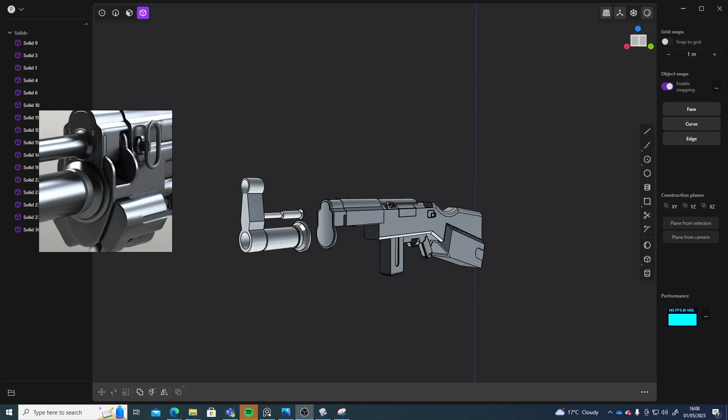Alright guys, welcome back to part 5 of making this assault rifle. So we did some good progress in the last part, and now we're going to continue making this piece and then the muzzle at the front, and then we'll start tackling some of the more kind of details here. It's quite a lot of stuff going on, but yeah, so we'll see how it goes.

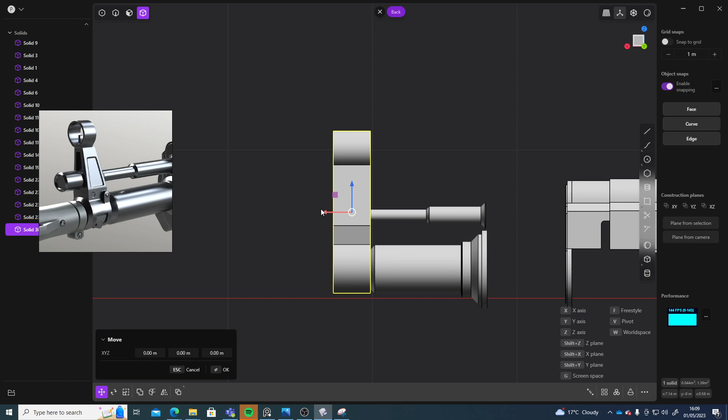So this is kind of straight at the moment, so I needed to cut and then up. To do that, it can be actually quite easy. I can just go into my side view. I'm just going to select this one for now and move it forward like so. And then I can grab a line. I'm going to go from the outside here and actually from this point, and I'm just going to cut straight to about here and then up. Let me see what that looks like if I press G, move it out. Oh, it didn't actually cut it. Let's see.

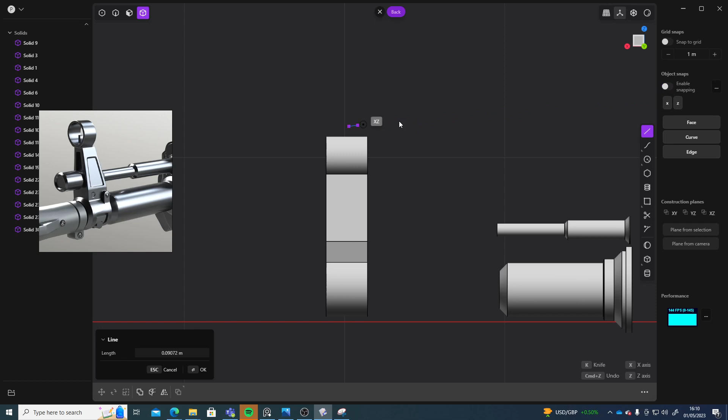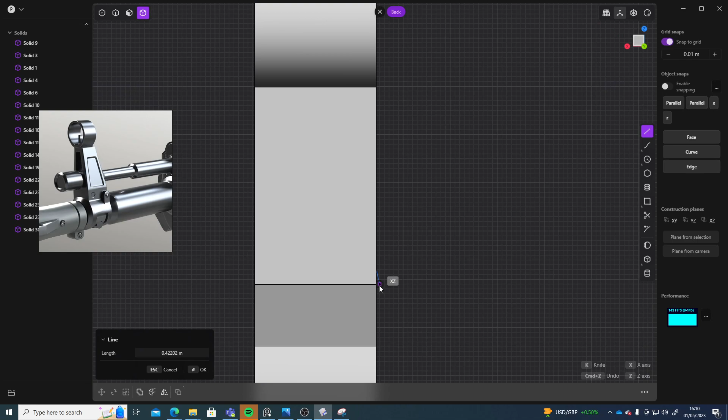Line, I'll do it for maybe here first. I want to keep that straight but snapping to that middle point. Let me just say object snapping off but grid snapping on. No, line, make it slightly smaller from here to here and then out a couple and then straight down to here and right click to confirm that. So that should create that kind of cut there.

So we can go and select the object and then press C and then select the curve and then right click to confirm, and that will cut out that piece. So I can select it, delete it, don't need that curve anymore. And we got that piece, which looks pretty nice.

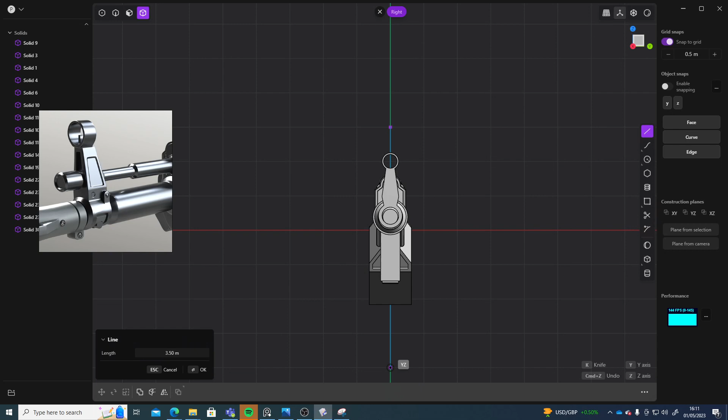I'm actually going to go into the front here. I'm going to create an edge that goes from the, let me just set that back to top, to the bottom like so, right click, and then I'm gonna select my object, press C, then select the edge, right click, and then I'll delete this half. I'll delete that curve. I'll mirror it over at the end. So another thing is this hole here, and I might do that once it's mirrored. Might be a bit easier. But this part here will be quite easy to do.

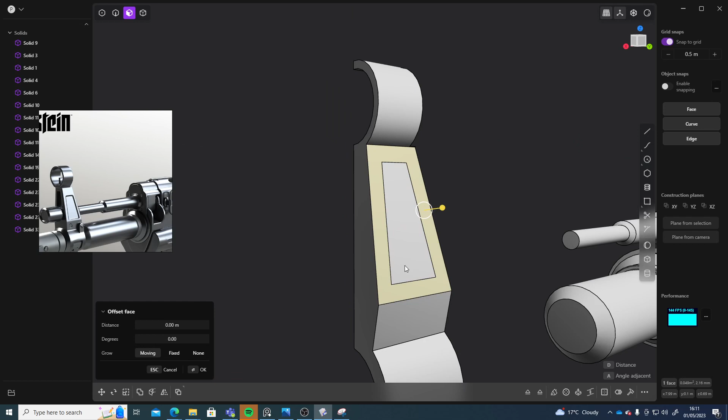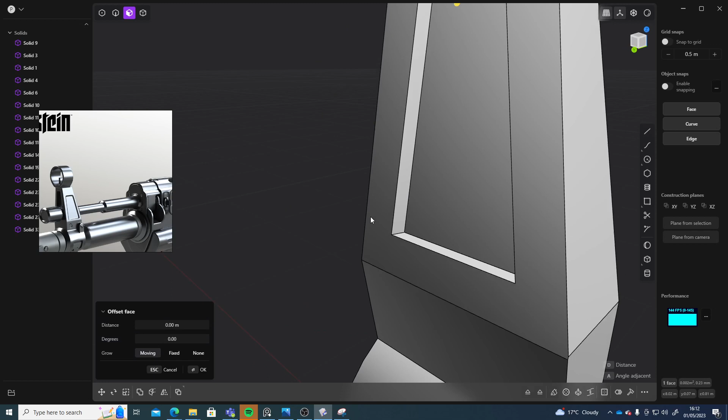I can go into face mode, select this, press O, and do something like that. And go into face, right click to confirm that, face mode again, click on this, push it in, grid snap off, push it in just a bit like that. Then I can grab this top one and pull that down till about here. If I hold Control Alt while in edge mode, I can select all of the rings, and I can give them a very small fillet. Keep them all nice and smooth.

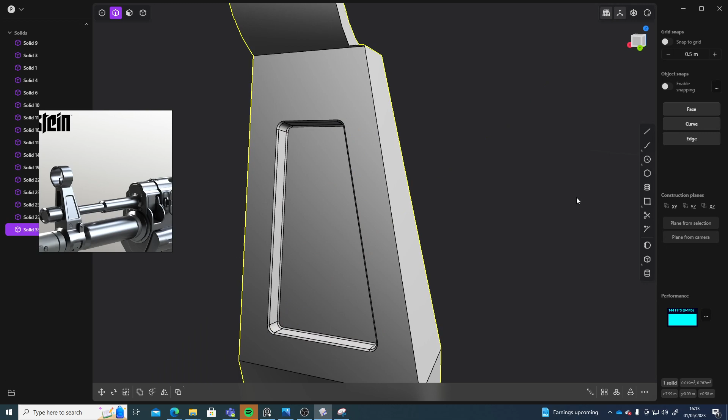Then next I'll just kind of give these a small bevel as well. Like so. And then maybe the inside ones as well. Like that. That looks good. There is a small circle cut out there as well, so I could do that. I could say center circle, and I actually go into front view. I'll just draw it straight here.

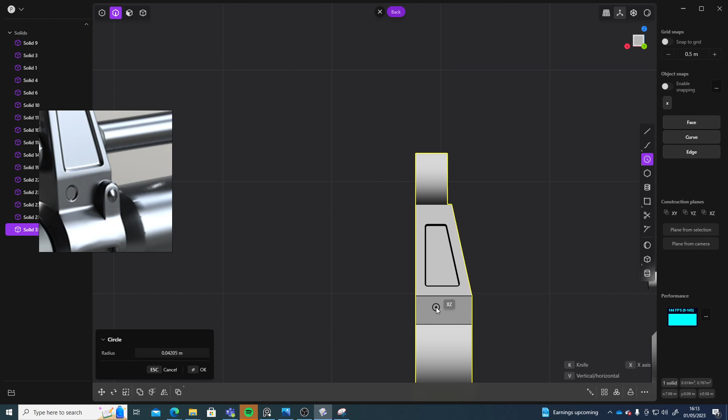So I got this. I'm going to press G, move it out, press S, scale it down about there. I'll press R, go into my front view and rotate it like that. Right click to confirm that, press 3 and push it in until it intersects it a little bit. That might be a bit too much. I'm going to pull it out a little bit.

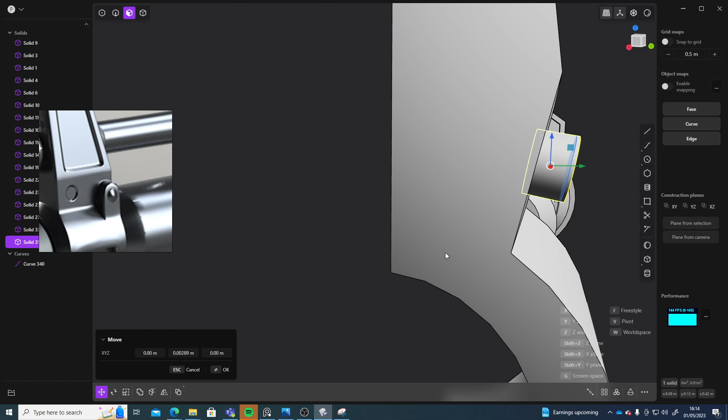Go into the front view. Just press R to rotate it. I'm just going to rotate it like that so it's almost perfectly perpendicular. Now I'll press 4, click on this, and then I'll just say Q, right click and delete that curve. So we got that little piece in there. For this little thing here, I can do a couple of different things.

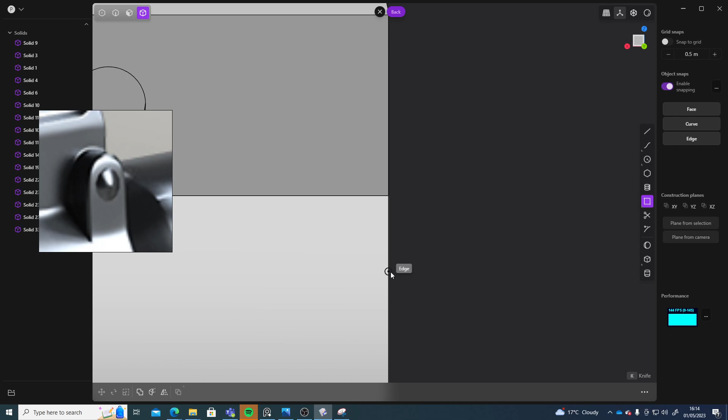So I'll go into my top view. Actually, I'll go into my front view. I'll say draw corner rectangle, and I'll say enable snapping, so it snaps to this edge here. And I'll just go out to here, and then I'll come up to maybe here. Right click to confirm that.

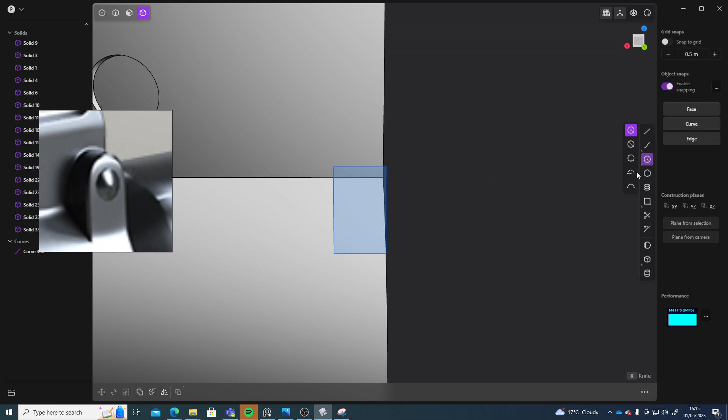And then I'll go into my 3-point arc. Click on that one, and actually I need to go into the front view because this doesn't work too well whenever you're in perspective. Be careful of that. So here to here, and it looks something like that, I believe.

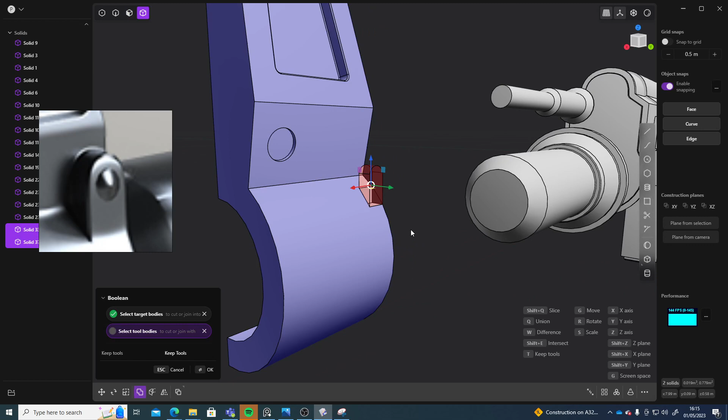Yep, that's good. Now face mode, select these two and just pull them in. There we go. Can delete these two curves. Go object mode, select this, and then shift click on this, and then press Q, right click. Then I can go into my edge, select these 3 edges, and give them a small fillet, which will make them look like they kind of are a part of that mesh.

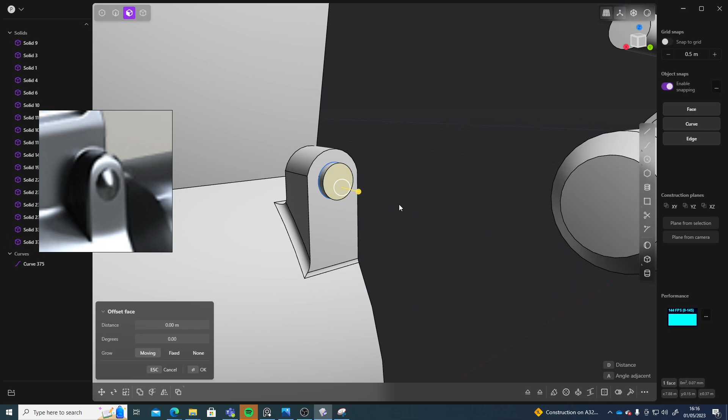Then next I can go into my front view again, and then go into center circle, and I'll do one here. Right click to confirm that, select that face, pull it out a touch, right click confirm, and then I might just go into edge mode, select this edge, and just give it quite a

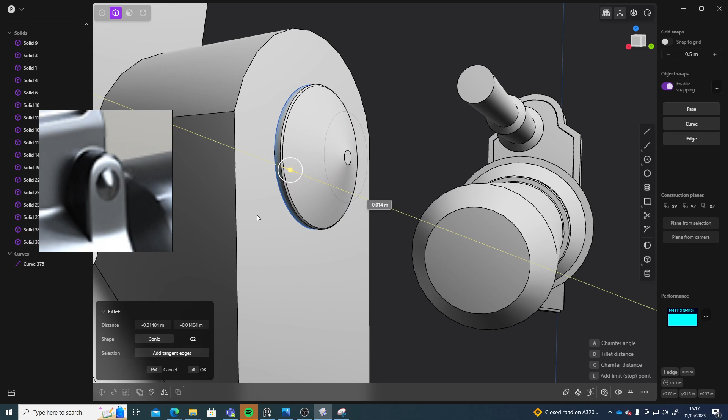I'll just give it a bevel like so, and then select this one, and do something like that. That keeps that pointy. Nice. Then I can go object mode, select this, then Q, select that, then Q again. Right click to confirm. So this piece is looking pretty nice.

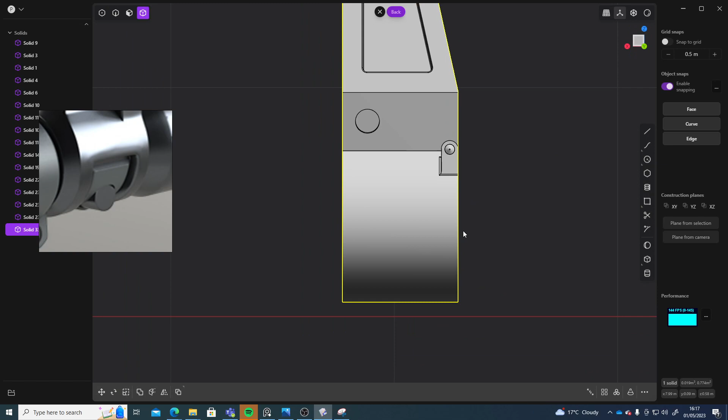There's also at the bottom here a little section there. So what I'll do is I'll go into my front view. Actually, I'll go into my side view here. I'll grab this face, and then I'll press Shift D to duplicate it. Now I'll move it to the side for now. And I want to cut out that area. So let me have a think about how I could do this.

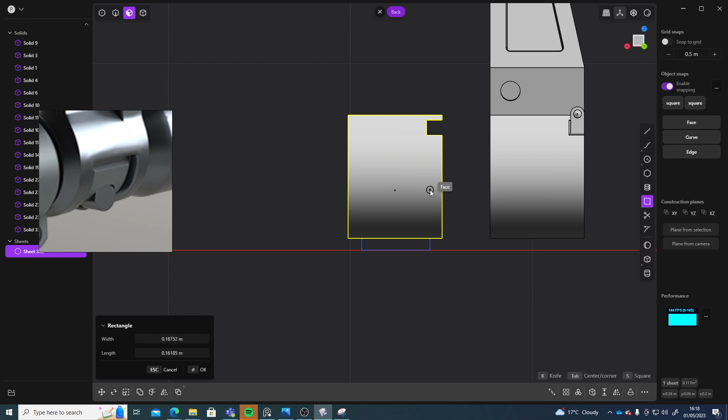So I can go into my side view, go to rectangular, corner rectangle, and I'll just click here, and then up to, it's a little bit lower I think, about there, and get both sides about right. That's good. Then face mode, select it and move it out like so.

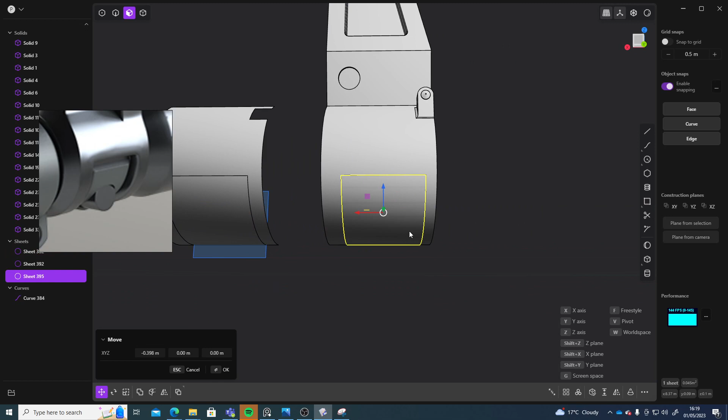Then I'll go and select this sheet and then press Q, select this one, and then I want to do Shift Q because I want to slice it. So that will actually slice this, and then I can delete these two objects, and I'll be left with this little piece here. So I can delete. Now I can grab this face, press Shift D, and move that into place. Yeah, the workflow in Plasticity is really nice.

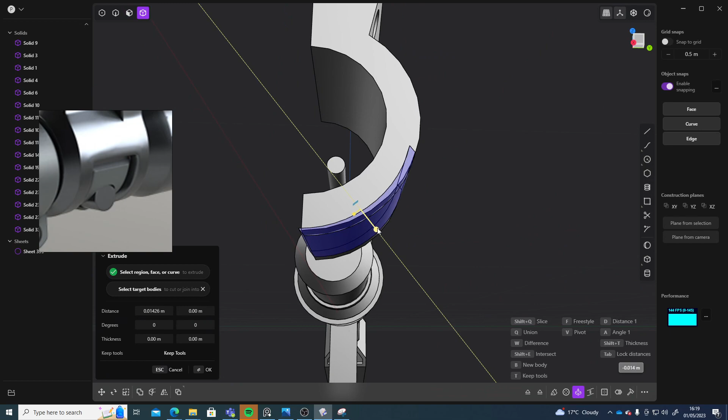Put that there. Go into object mode, and I'm just gonna delete this, and then delete these edges here. Now I can go in face, select this one, and I'm just going to extrude inwards a little bit. Maybe a little bit more. Something like that. No, that actually wasn't extruding, so I'm going to press E. So it will kind of do that, which I don't know if I want.

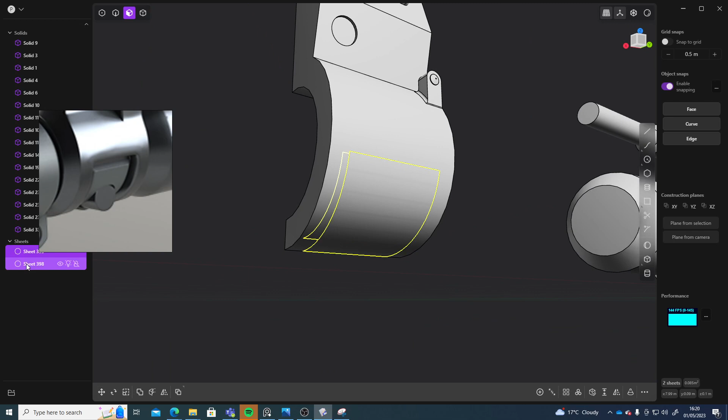Actually, I'll duplicate it. So we have two sheets, and I'll go into face mode, select one of them, and then just move it in to about here. Right click. Then I'll grab these two sheets, and I'll press G, and I'll move them to the side. Then I'll go into edge mode, select all of the edges, and then I can press L for loft, and it should loft it together. I'll do them individually actually. I'll select this edge and this edge, and press L. So that lofted it together, but I created this weird curve.

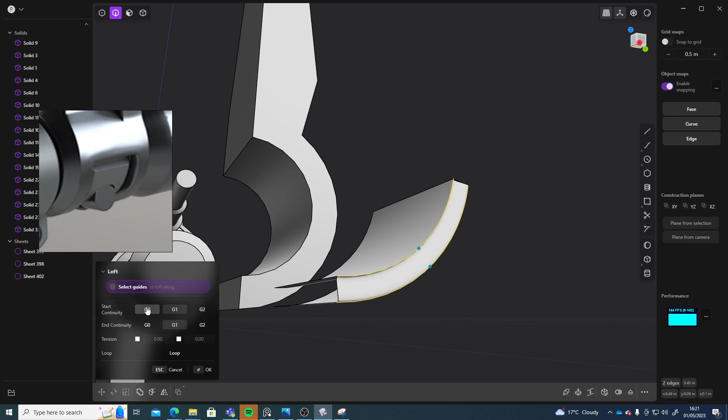And let me see if there's a way of changing that. G0, G0, okay. So you can actually. L, G0, G0. I'm not sure what those do. I think there's like different kind of tangents. So G0 means probably no tangent. I'm not entirely sure. But that gives me a nicer result.

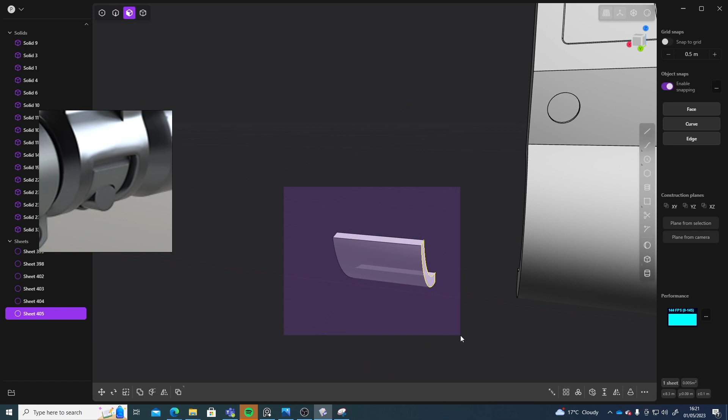Nice. So now with that done, I can grab all of these faces and press J, or grab all of this and J, which will turn it into a solid. So J kind of joins them together. Then I can move it back in place.

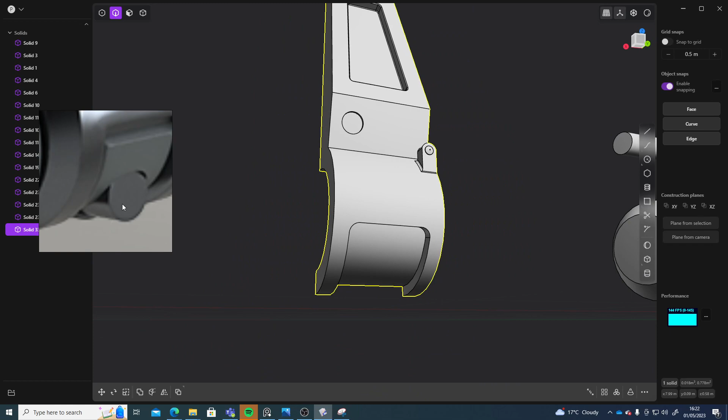Cool. That is looking nice. Then I can go into object mode, select this, press Q, then select this, and then right click. And we got this pretty nice effect. I'll go edge mode, I'm going to select this edge, and I'm just going to give them a pretty strong fillet there. And I'm not going to worry too much about that specific part for now, I'll do that later.

But that is looking like a pretty nice piece. There's only one small little thing here in the middle that we need to do, but I think for now we'll leave it like that. So I'll press G and I'm going to move it back in place. Right click to confirm that.

And then I'll go and select it, and I'll press Alt X to mirror it over to the other side, and then select this one, press Q, select that one, and then Q again, and then right click, and got it mirrored on both sides. Nice.

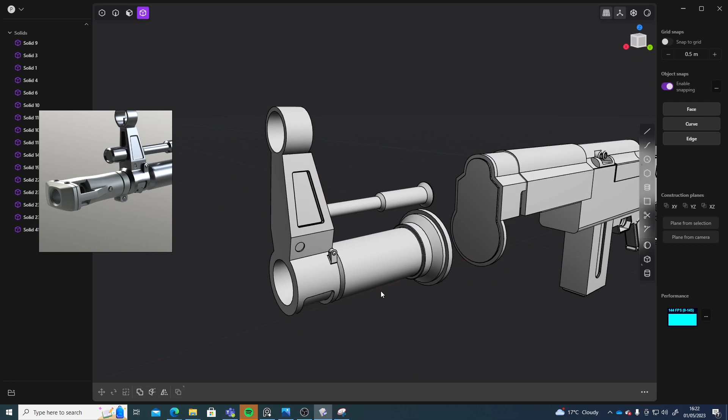So next, this piece, and I was having to think about how I could do this, and that's a bit of an odd kind of piece, but let's see if I can tackle it. So what I'll do is I'll create an edge that goes from the center here outwards, like so. And then I'll right click to confirm that, and I'll press Shift D and move it down to about here.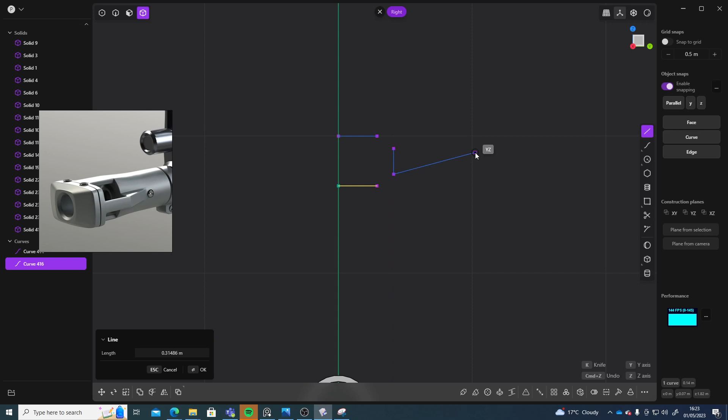And then I'll create another edge that goes from here to here. And then I'll right click to confirm that. And then I'll press Alt X on this edge and mirror over to the other side. And on these two, so let me just go into edge mode, select these two. Alt X over to the other side. Then if I click this one and then this one, press L, it will loft it together. L, L, and L. So that's created now this sheet.

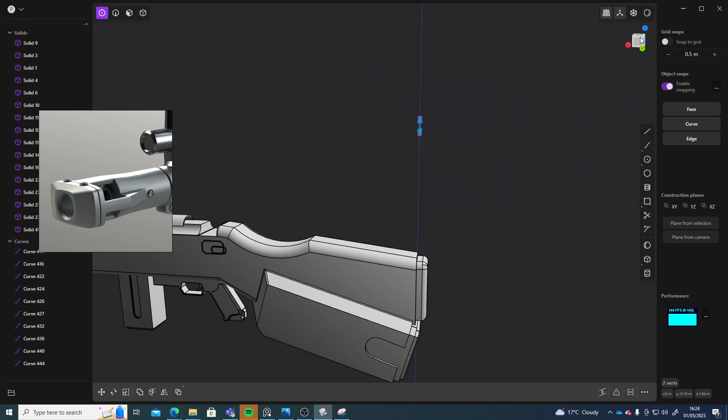So next what I'll do is I'll go into my side view here and I'll select the face and I'll press Shift D and move it over here just a little bit in front of it. I'll go back into my front view and I'll start scaling this down. So I'm gonna press S and I'm gonna scale that down like so, and then scale it down like so. Right click to confirm that.

Then I can press my edges, go into edge mode and select all of the edges and press L. And that doesn't seem to have worked. Let me see. Alright, cancel. Oh, it's because that's one solid one and these aren't. So I'm just going to select all of these and press J, which will make it one solid one. Then press L. And it did kind of work, although it messed up the...

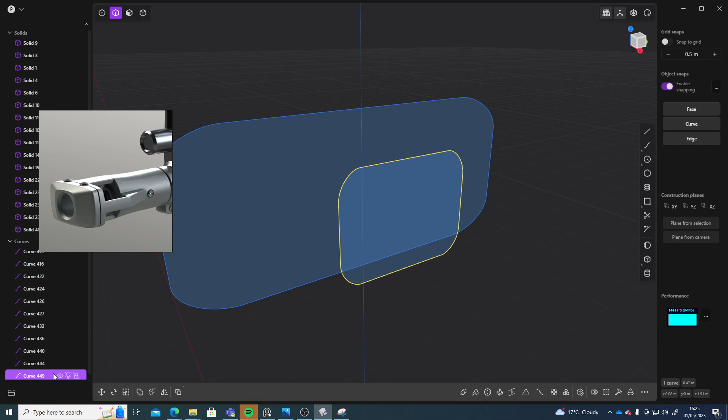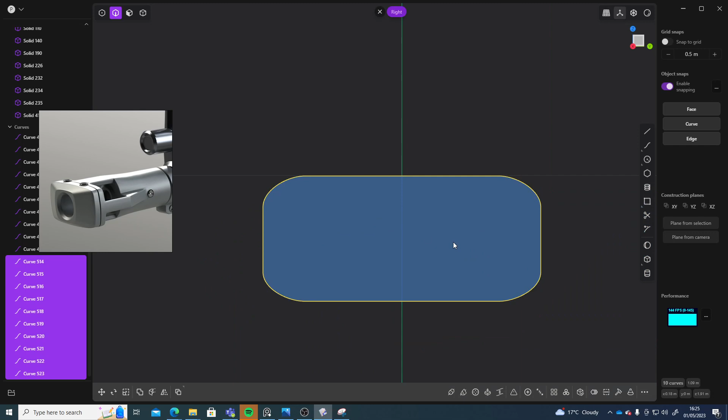Yeah, so I'm actually going to delete this one because I want them to be all separate. I don't want to join them together because I think the loft will work better. So I'll go back into the front view and press S, scale it down and then down like that, and then G and move it back. G, move it back even more. Scale that up a tiny bit.

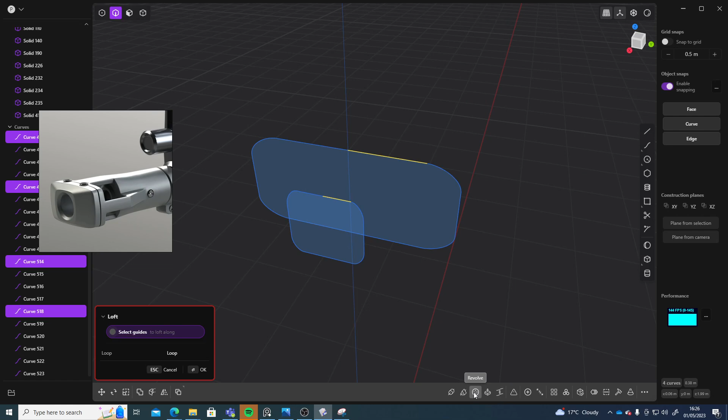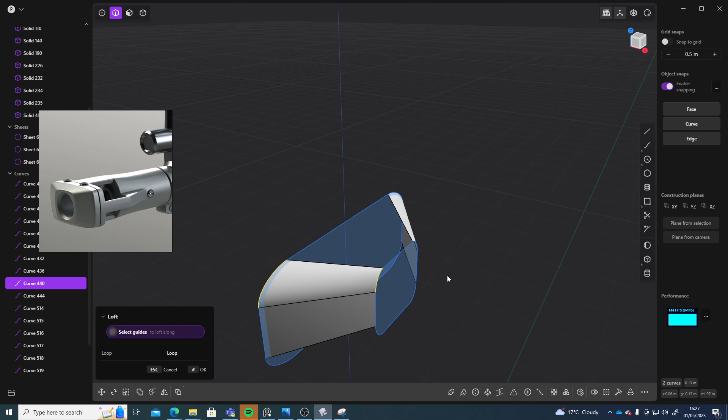And then now I can start selecting these. Let's see. So that doesn't seem to be working. It works on that side. I'm gonna see if I can work my way around and see if I can get a nice result from this. Again, there may have been a better way of approaching this, but this will definitely work.

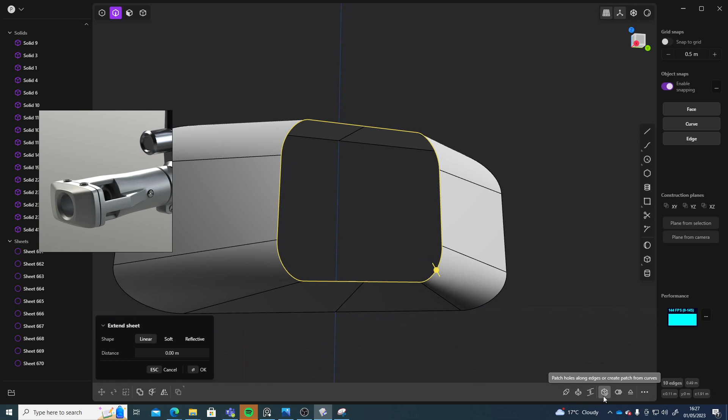Nice. So that'll give us this quite interesting shape. I'm going to delete all of these curves, created a whole load of them, but don't need them anymore. Now if I select all of these, I should be able to close the hole. So I go close hole, patch hole, and it doesn't work. Let's see, maybe it's because I need to join them.

So J, J, there we go. Now I grab all of these. And patch holes. Yeah, there we go. And then on the side I'll do the same.

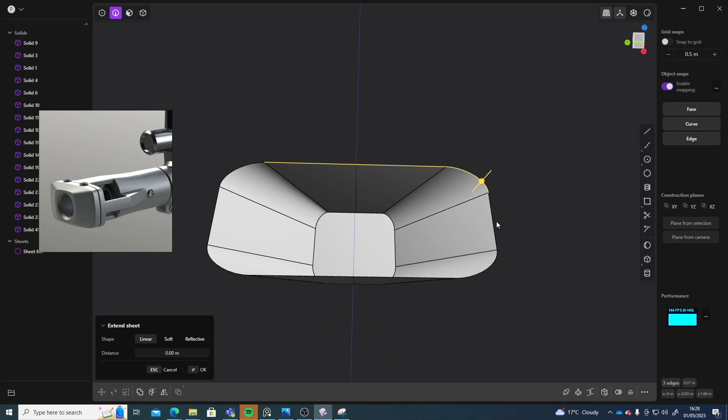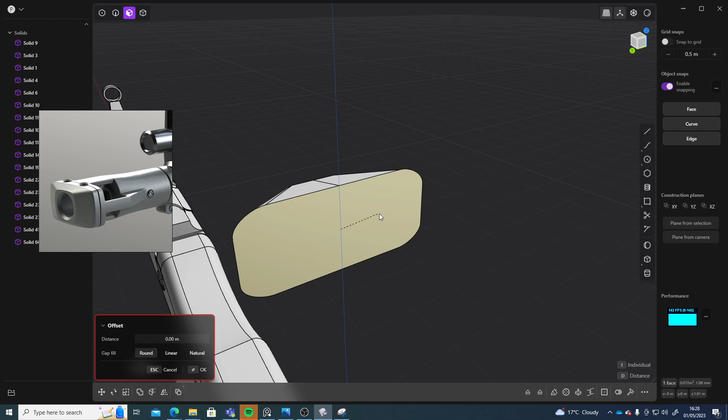Nachos. Nice. I'll go into face mode. I'm going to select this and I'm going to offset it. Actually, no, I'm not going to offset it. Cancel. I'm going to select it and I'm just going to move it forward. Press E, extrude it a little bit to about here. Maybe a little bit more. Actually, that should be something along those lines.

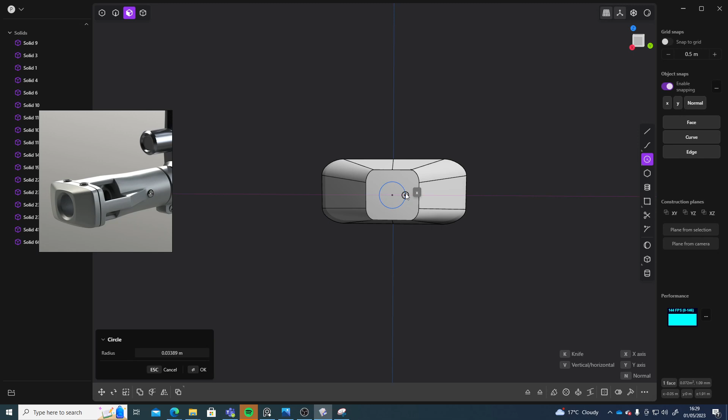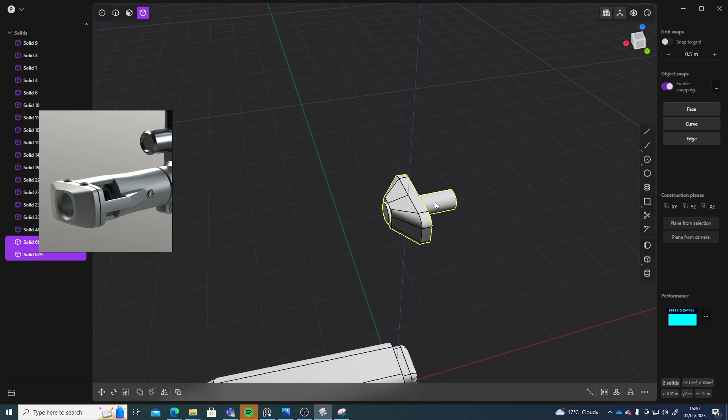Alright, so I'm gonna create that face here, the circle. So we'll go to center circle, select the center here, and then just pull it out to about there. Right click to confirm, select this face and move it in all the way. Right click, press G, I'm gonna move it out a tiny bit and delete that curve. Press 4, click this, then click this, and then Q. Right click. And we got that nice little hole cut out.

I'm gonna give that a nice bevel. Not too big though, maybe something like that. Yeah, we got that shape created. I also select these and give them a small fillet. Something like that. Maybe a little bit smaller. Like that. Should give us a nice little detail.

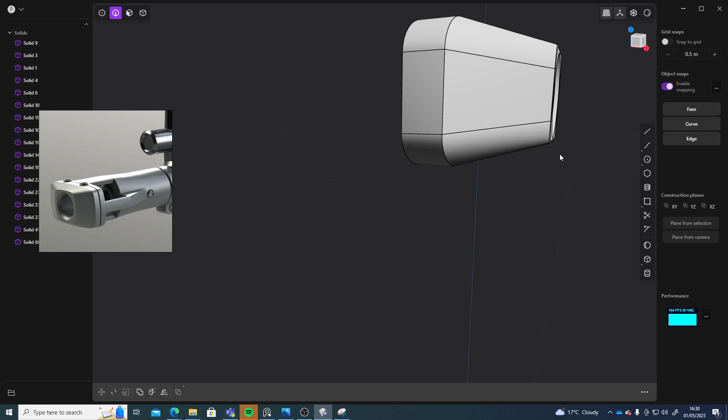Alright, object mode, select it, press G, move it over. I'll go into my front view. Let me look at my reference. So that's gonna be about here. I'm gonna press S and scale it up a little bit. I can position it a bit better later and scale it down like this because it's quite flat. But from the front view it's looking a bit too wide. So I'm going to press S and just scale that in. Oh, but it's going to scale the circle.

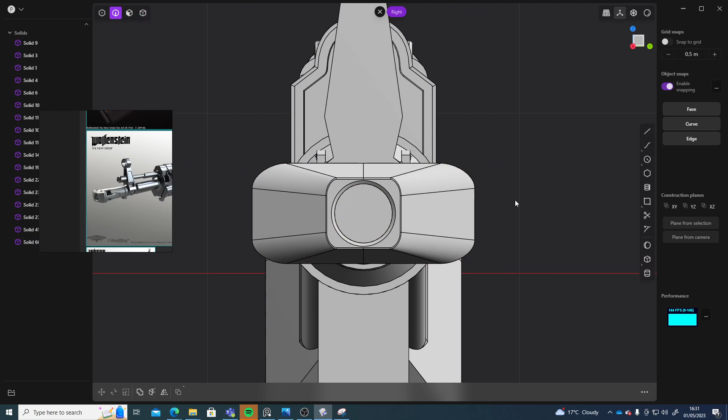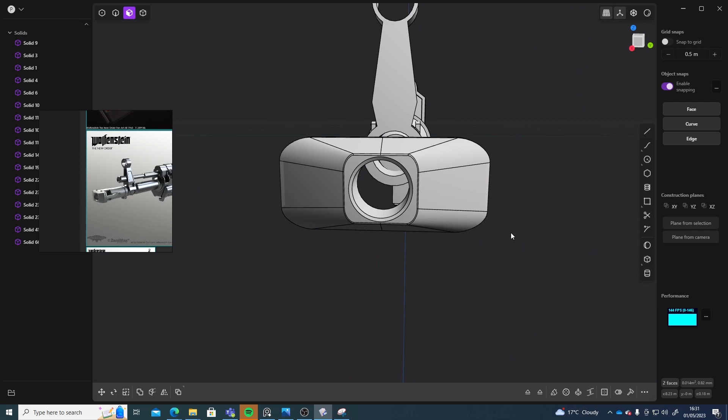So I think what I can do instead is go into face mode, select these three and these three and just push them in. Oh, that's actually creating a pretty interesting shape. Maybe I just need to select these two. No. Or I select these edges. This one, this one, this one, and this one. G. That's not gonna work. Maybe I'll just scale it all down a little bit like that. And then in. Yeah, that looks alright. Got an interesting kind of nozzle there.

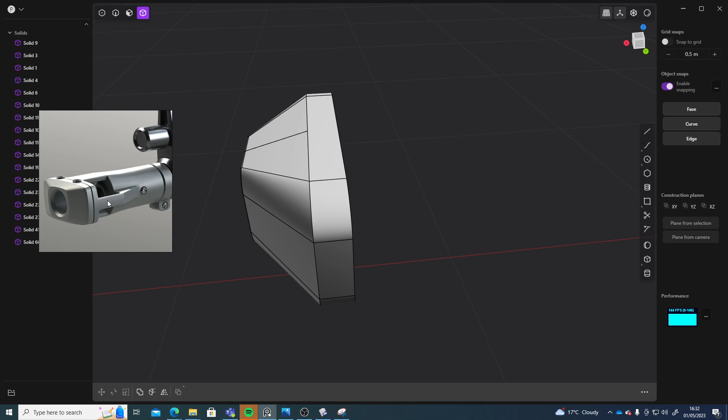Alright, so I'm gonna need to cut a little segment here that I can extrude out. So I'm actually gonna do that in the top down mode. And I'll go to my edge creation or line creation tool here. I'm gonna click here. I'm gonna go forward a little bit. Click here, and then I'm gonna go in a little bit. Click here, then come out to about here, and in, and then back, and then close it.

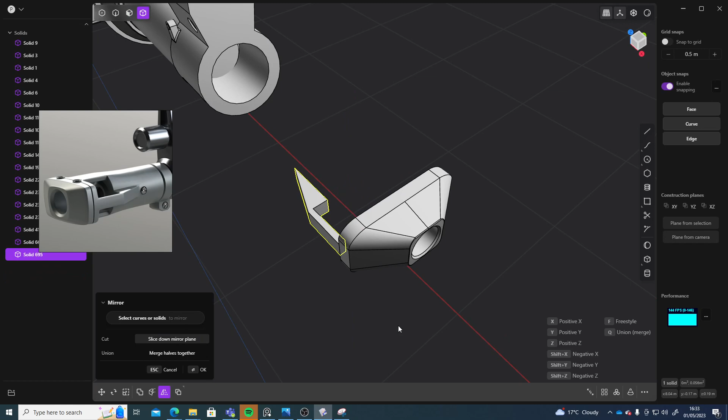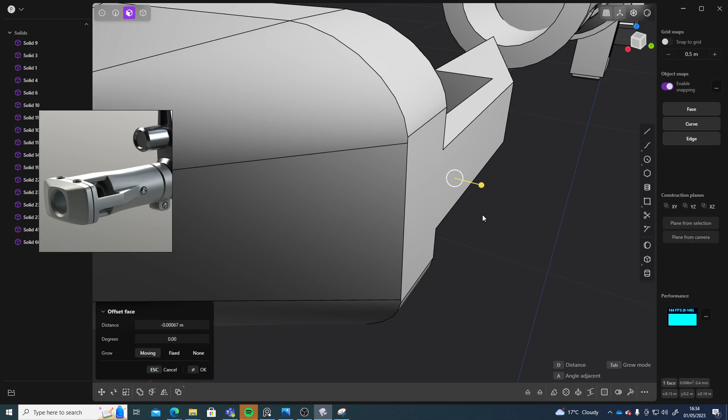And then I'll go into face mode, select that face, and extrude down. Right click to confirm that, G, move that down, delete that curve, select this, Alt X, which will mirror it onto the other side. And select this, press Q, select these two, Q again, right click. Think it didn't exactly work on the side. Let me just... something like that. Cool.

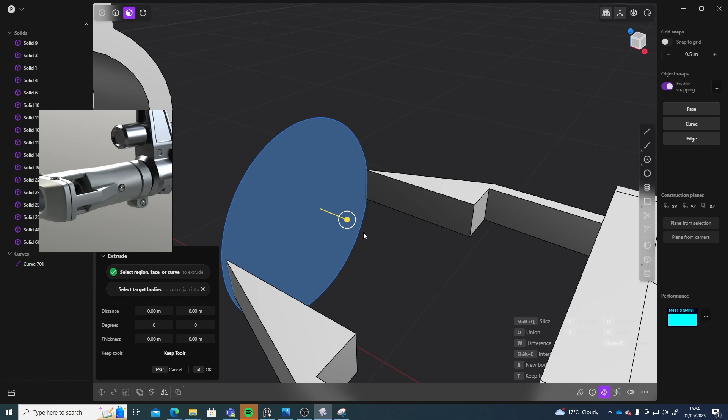Now I need to create the rest of this part, so I'm going to create a cylinder. Go into front view, create a center circle. And it will be about that big. Right click, confirm. G, move back. And let's see what the scale of this is. S, gonna scale that down until it's almost flush with that. And I can grab this face and pull it out. It's about there. Grab that curve, I'm gonna delete it.

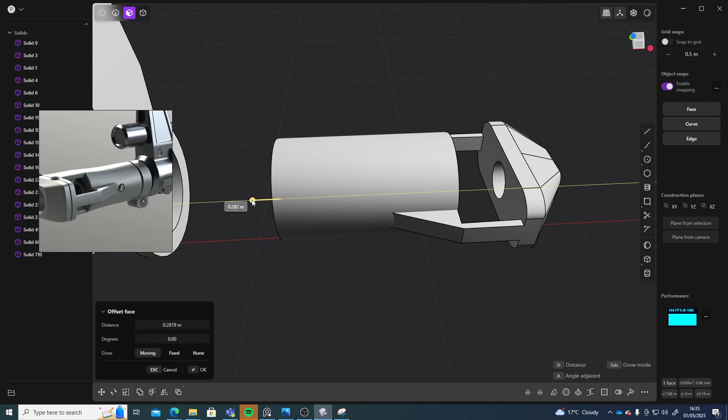I'm gonna grab this end, I'm going to pull it in like so. Now we're gonna have a cut, but we'll leave that there. Grab this part, press O, extrude that in. Grab it, press O again, extrude it in. Grab this face, pull that out all the way. And grab this one and pull it out a little bit. And I can go select this edge. Something like that. Cool. And then we're just missing the top part.

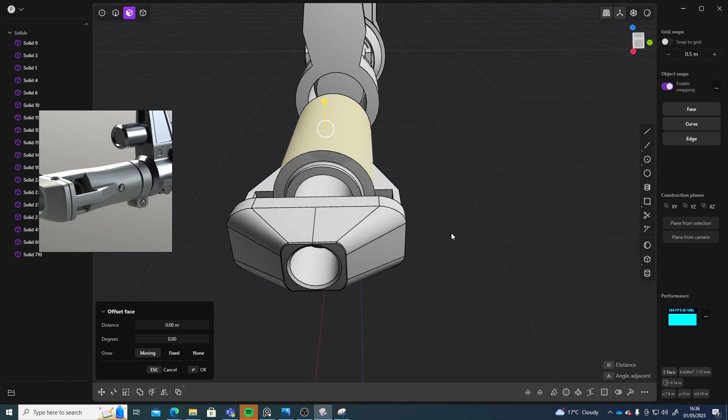To make the top part here, I'm just gonna duplicate this. Move it forward. Oh, shoot. Move that forward. G. Just duplicated that face. And I'm gonna go to top here. And I'm going to grab my rectangle, but I want the center rectangle. And I'm going to snap to this point, and I'm just going to create a rectangle-like shape like this. Maybe make it a little bit longer, like that. Right click, and go into face mode, select the face, extrude it out, or in actually in this case.

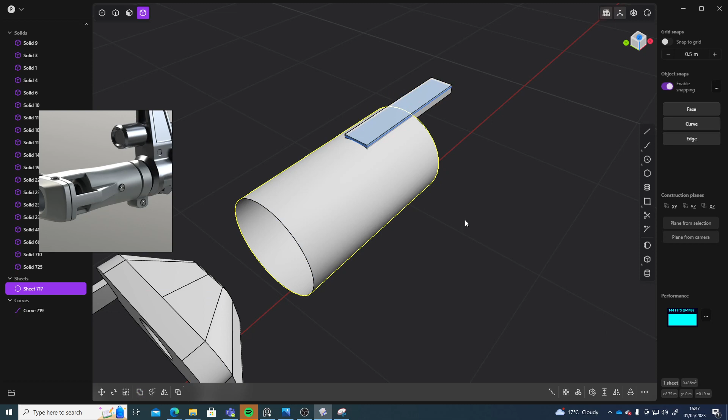Press G, gotta pull that up. Then press 4, gonna click on this piece, and I'm gonna press Q, select that, and I want to do Shift Q slice, and then right click. And now I can delete this curve. Oh, that did not cut it.

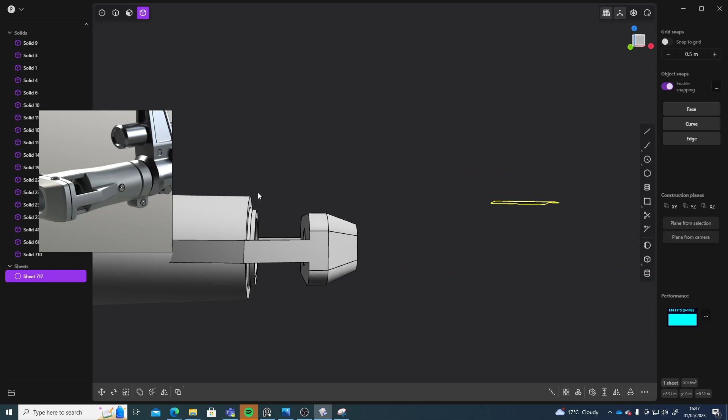So Q, select that, and maybe Shift E to intersect. Yeah. So I get this little piece, which is the same curvature as that, which I can place here. Right click, I'm going to grab this, I'm going to press S, and I'm going to extrude that out, or scale that up. Oof, this is a bit messy.

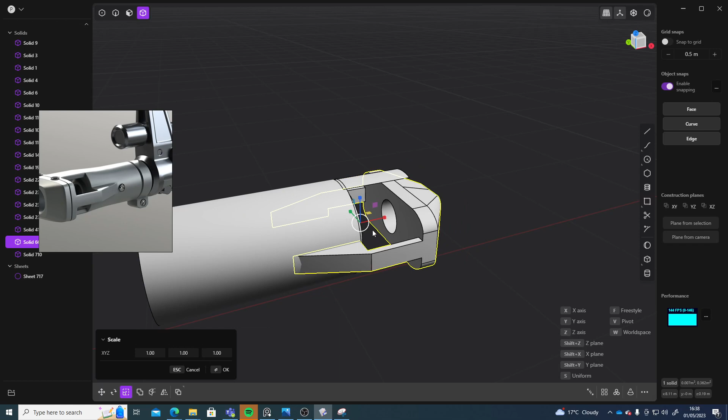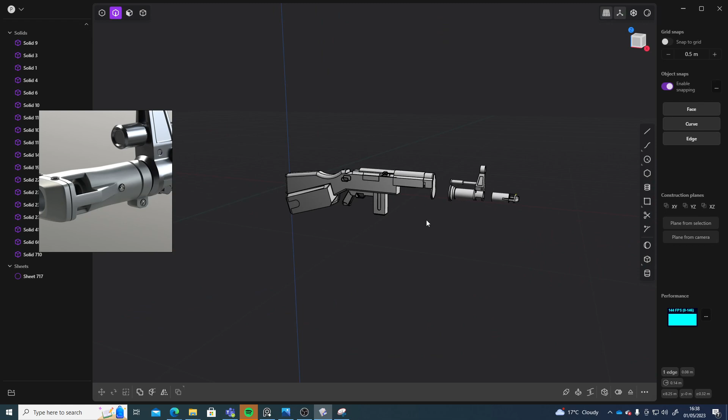What I'll do is I'll actually go into face mode. If I grab all of these, what's going to happen? I'll actually extrude it up. If I grab this edge, press G. I can't move it.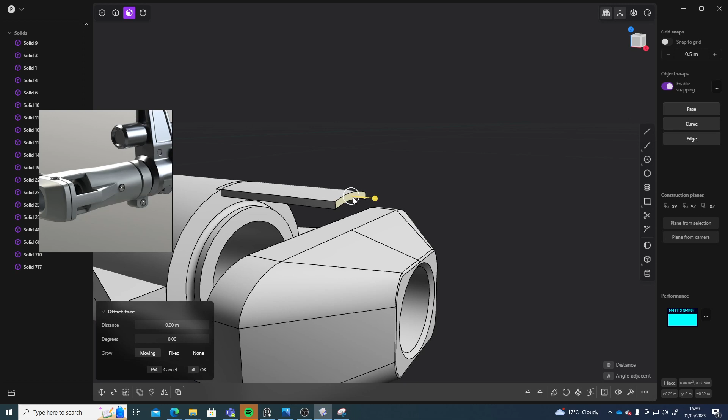Alright, so I'm just gonna grab this face here. I'm gonna extrude it down a little bit. Grab that, and I'm going to grab this face, and that's not gonna let me. Yeah, I don't know how I'm gonna link that up actually.

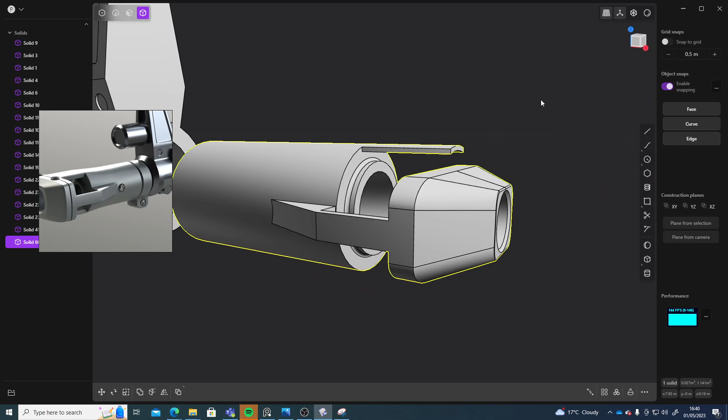So first thing, I'm just gonna select this object and select this, press QQ to join them. Then I'll select this and this, QQ, join those. So before I join it, I'm actually gonna mirror this downwards.

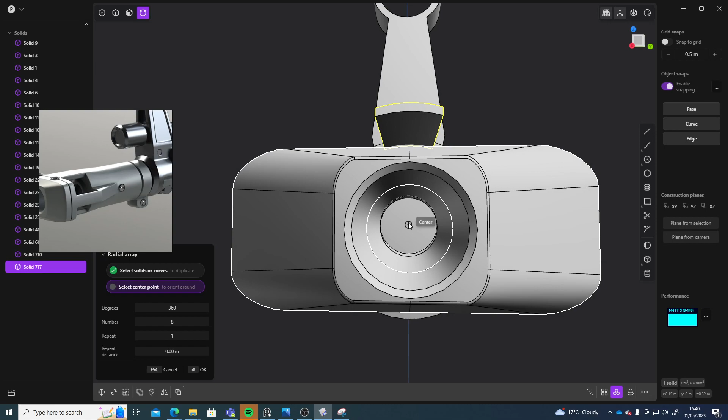Or I'm pretty sure if I type in radial array and put the center right bang there, it's going to create a bunch of those tubes, but I'm going to say repeat number 1 and degrees 180 maybe, or 0, 180, or number 2, yeah, right click, and then yeah, actually that's fine.

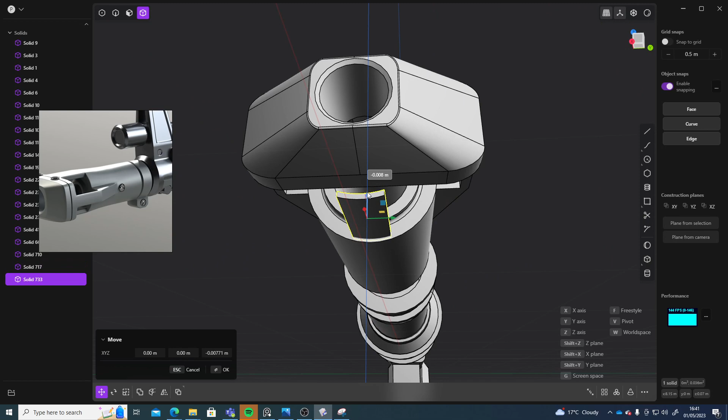So then I could select this one, press G and move it down. I'm not going to be able to get it perfect, but it'll be fine, until it's basically flush with that. Press this and this, QQ, and this, QQ, and this, QQ.

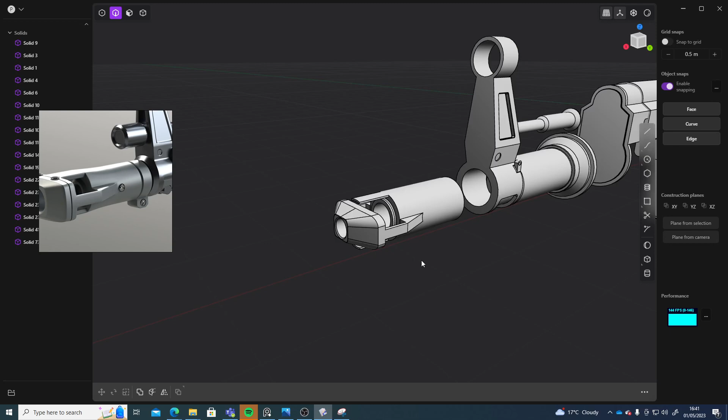And if I press, well, I think we'll leave it like that and then we'll come back to that. I'm not sure exactly how to do that part. Just working with NURBS is quite interesting, but also has its limitations, I suppose. Or maybe there is definitely a way to do that, but I don't know it.

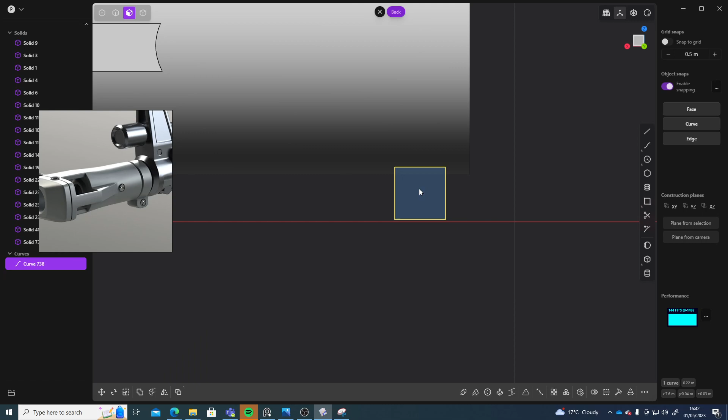I'm going to create a rectangle here. Right click, select that face and then extrude it, like so. I'll actually go a little bit further than the middle point, because then I'll just mirror it over and I'll be fine. Then I'll go into edge mode, select these two, give them a bevel. Then I'll delete this curve, go into center circle, put it here. It's going to be for that bolt.

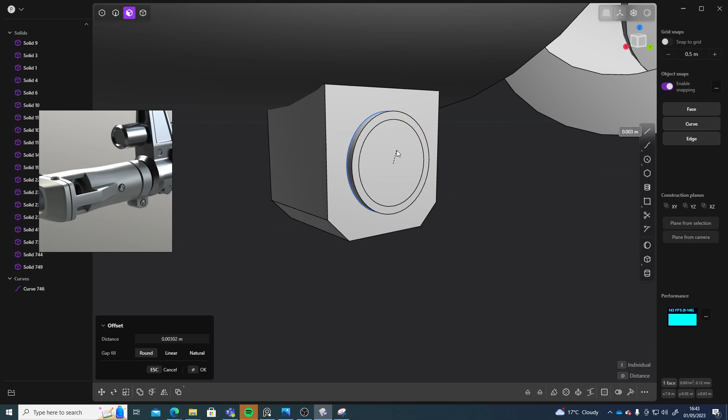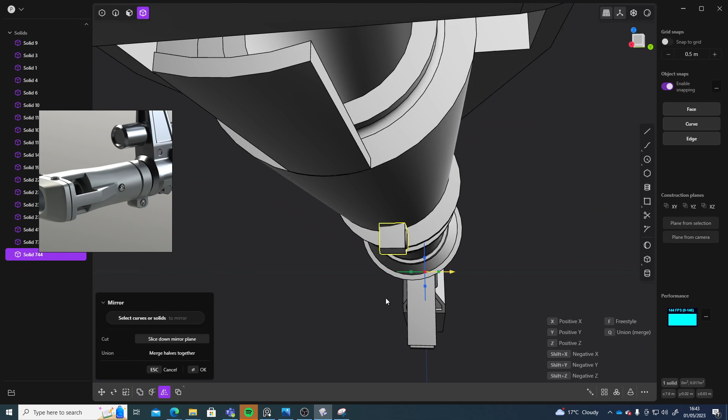Right click, select this face, extrude it. Select that face, offset it. And then I'll just pull it in. Again, doesn't need to be exactly the same as the reference, but I'm just seeing how it goes. That there, QQ, and then Alt X to mirror it over to the other side. Right click, confirm that.

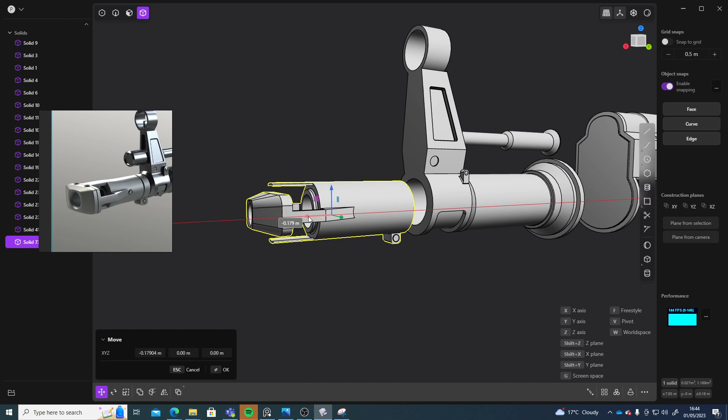G, I'm going to move it up till it's intersecting all the way. Then select this, QQ. Nice. That's a pretty nice looking piece, besides that part just floating there. Yeah, and then I can just press G and hook that up there. Needs to come up a little bit.

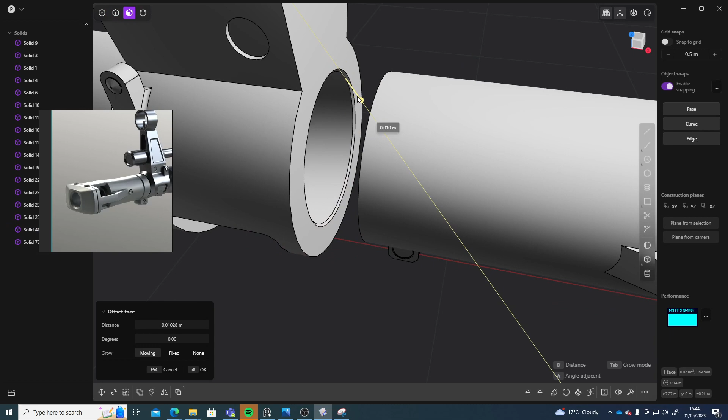Actually, before I do that, let me create a, actually no, I need to cut a little part here to create that circle. Or I can grab this edge and bevel it, and then grab that face and press E to extrude it. No, face E. Okay, that doesn't work. No worries.

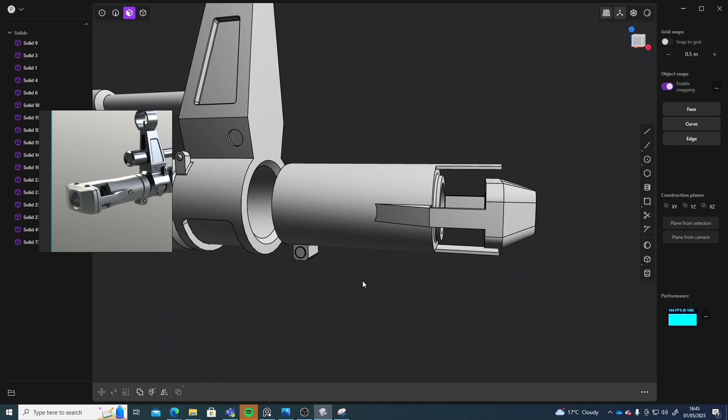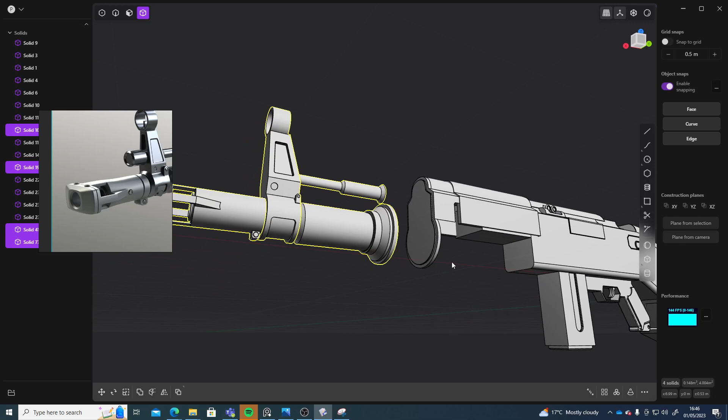Maybe this just slots in there. My design will be slightly different. Oh, nice. That is looking pretty nice. I grab these pieces, gonna press G, and I'm gonna move them into place. I'll leave a little bit of a gap because we need to do a little bit more work actually on this part, so we're gonna create some more stuff there, but we can leave it like that.

Alright, so that'll be it for this video, but it's starting to come along pretty nicely and we're getting there.